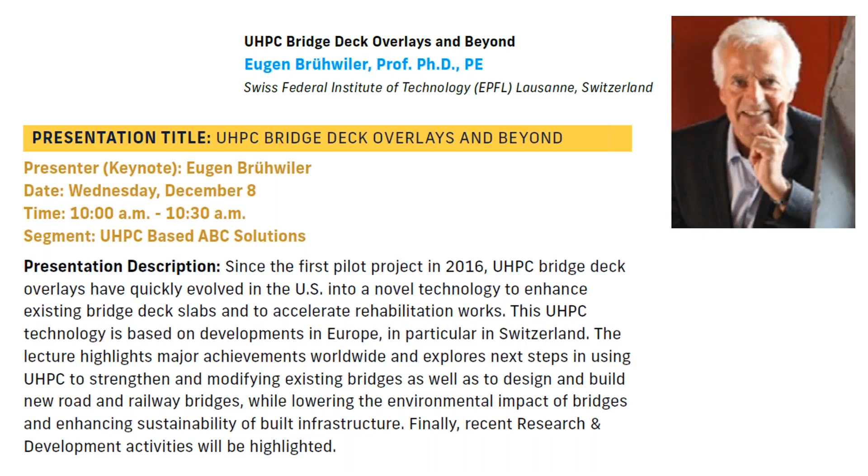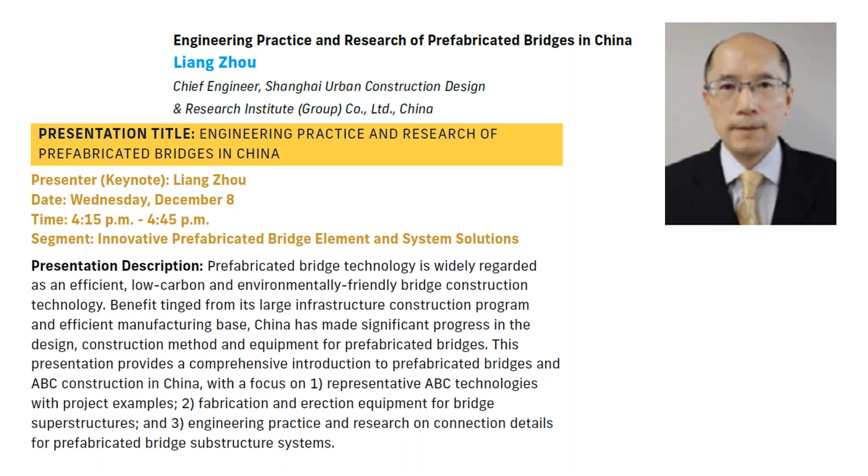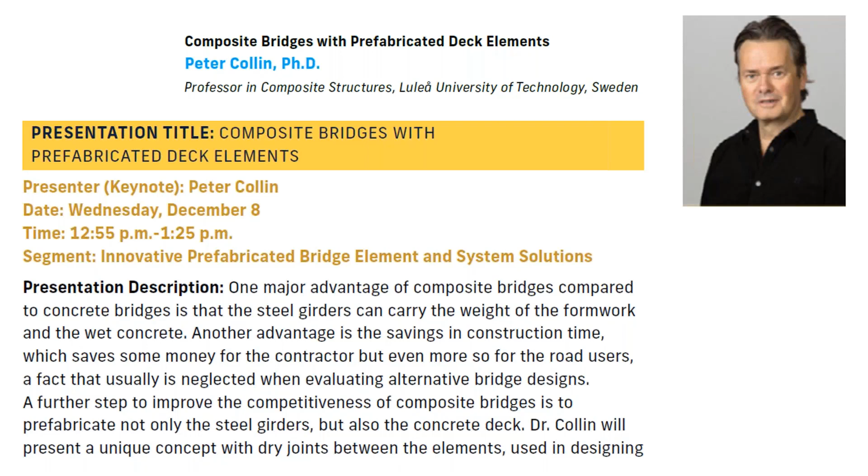We are going to have an excellent presentation summarizing everything China is doing in the ABC area. Liang Zhou, who was a chief engineer at the Shanghai Urban Construction Design and Research Institute, is going to give us a very comprehensive presentation on ABC in China. Peter Collin in Sweden is going to give us some really innovative concepts for prefabricated elements and modules for ABC.

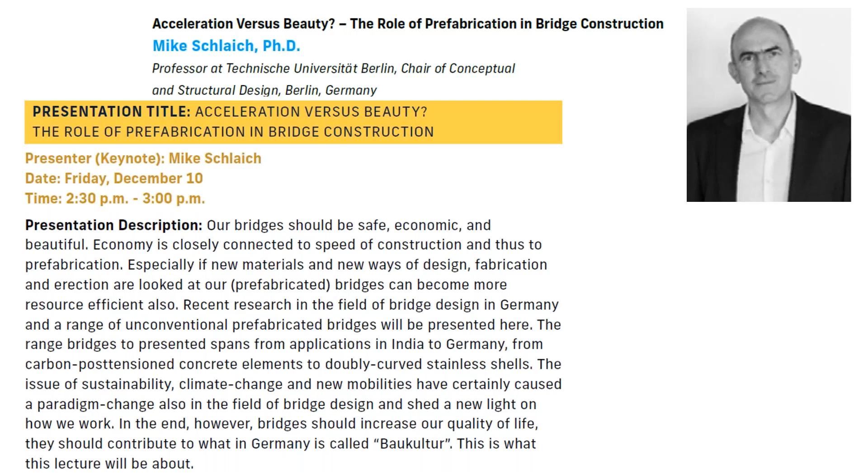Mike Schlaich of the Technical University of Berlin, and I visited his lab, they are doing some wonderful work in the area of ABC, specifically small segments that are built and then post-tensioned together. So he's going to give us a very good summary of the work in Germany. Other presentations in the conference: Miguel Ortega will be giving one on ABC for high-speed rail. So it's a very good opportunity for your contractors and so on that may get involved, especially on the West Coast, to see this.

Talking about the West Coast, Dory Mellon and Jay Holombo will be presenting the new Caltrans ABC construction manual that has been rolled out. There is a lot of interesting work going on in the development of new equipment for ABC in China. So Hu Shudong will be giving a presentation providing a summary of new equipment being developed for ABC use. And then we have Laurent Bjorn, who's going to give us case studies of UHPC field applications in Switzerland, both for retrofit, overlays, and so on.

The conference is going to include a very interesting workshop that's going to be hybrid. It's going to be held physically. You're going to see how it feels to make UHPC when you mix it and so on. We, the ABC UTC researchers, have developed a non-proprietary version of UHPC. In addition to us, many others have also developed non-proprietary UHPC. This workshop is going to allow you to see what we at the ABC UTC have done, and also six other universities that have independently developed non-proprietary UHPC.

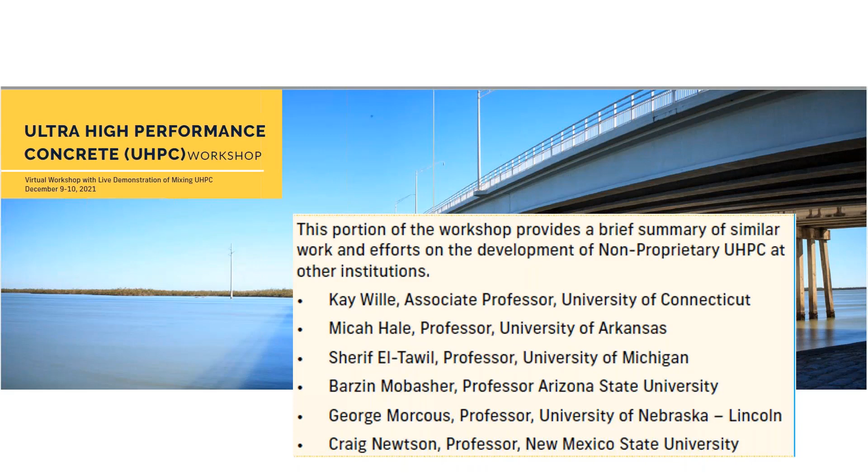This includes the University of Connecticut, University of Arkansas, University of Michigan, Arizona State University, University of Nebraska-Lincoln, and New Mexico State University. So you will see how simple it is to make UHPC and how simple it is to have the ready-mix company in your area make UHPC. Our objective is to show that hopefully within the next few years, it's going to be almost just like making regular concrete. So please encourage the ready-mix companies in your area to register and attend the conference.

So at a glance: 16 keynote talks, 30 presentations. It's going to be very entertaining. There's going to be music of the world in between the presentations. We are going to have a spotlight on the exhibitors. So if you would like to exhibit, please contact our staff. Like I said, the UHPC workshop, award programs, the reception, and of course, the exhibit hall.

We are also very happy to tell you that in 2022, finally, we are going to be getting together face to face. So the call for abstracts for 2022 is up. Go to our website. Please consider submitting an abstract.

Again, in summary, please assist us by registering early. If you have enjoyed all these webinars that we have held over the last 10 years, please show your support, register and attend the conference.

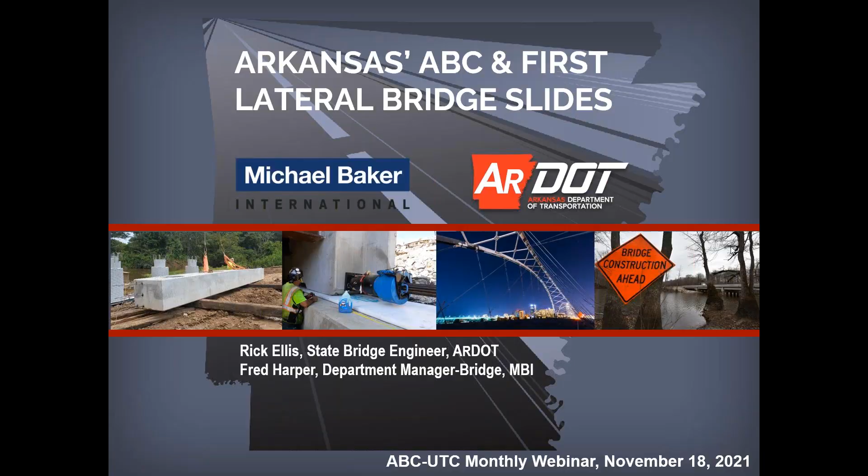Good afternoon. Again, my name is Rick Ellis, the State Bridge Engineer for the Arkansas Department of Transportation. My co-presenter today is Fred Harper, Department Manager for Bridge at Michael Baker International. Thank you for joining us today. I'll provide a brief discussion of the first 6 projects on this list. Fred will discuss the last project, our feature presentation.

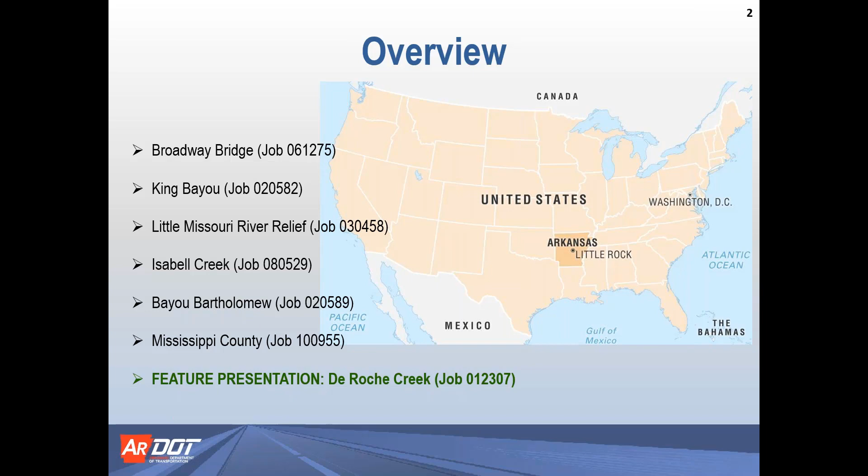During this committee, we developed our ABC evaluation criteria and flowchart, and a list of ABC methods that we would like to consider for use in Arkansas. ARDOT's ABC policy was implemented by our Deputy Director and Chief Engineer on April 24th, 2014.

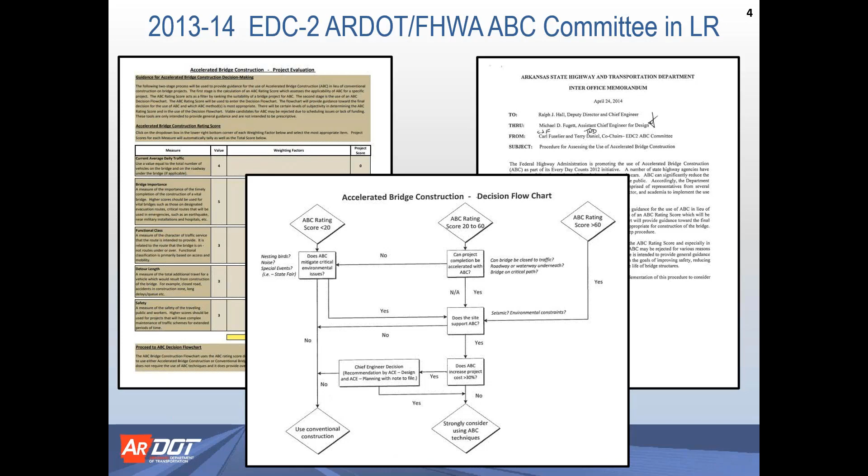Our first project that I would like to highlight is the Broadway Bridge replacement that was let in September 2014. It was designed by Garver Engineers and HNTB. It was twin basket-handle tied arches. And the project location is downtown Little Rock over the Arkansas River.

In our presentation today, you'll hear a lot about our A plus B plus C special provision. I'll discuss that a little bit in depth here so you'll know what those letters stand for going through the presentation. A is the contract dollar amount. The B for ARDOT is a subset or unique item within the contract that needs to be expedited. And C is the total contract days.

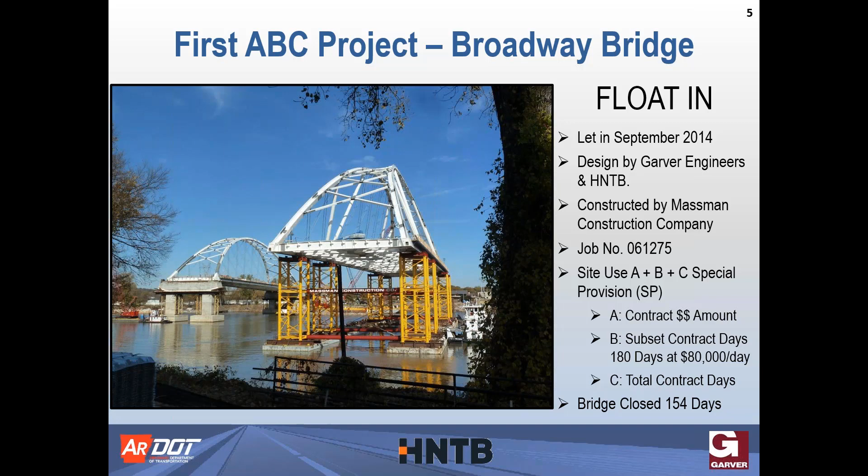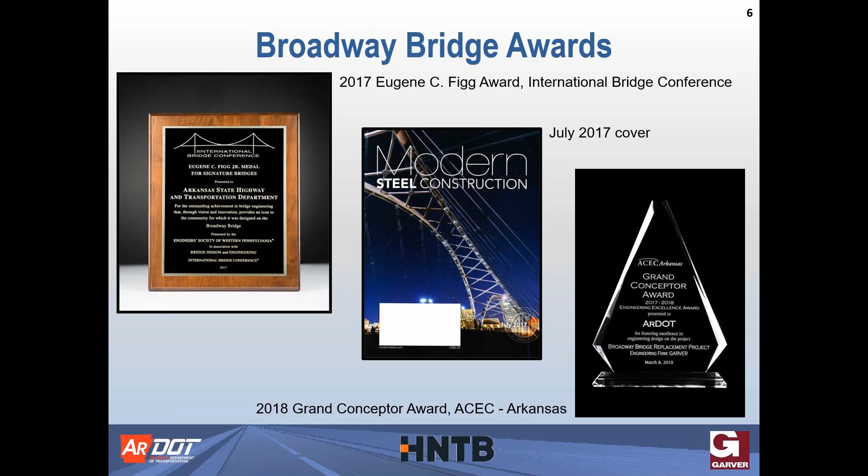For this Broadway Bridge job, the contractor was allowed to close Broadway Street, a major corridor over the Arkansas River between Little Rock and North Little Rock, for 180 days at $80,000 per day. The contractor received incentive as he only closed the route for 154 days. We're quite proud of this bridge. This slideshow just shows a small sampling of the attention it received.

Our first use of prefabricated bridge elements is at the King Bayou. This is a bridge in southeast Arkansas. Our options were to construct a temporary bridge or close the highway and use ABC. We had a reasonable detour, so we chose to close the highway and use ABC. We used precast bent caps and precast abutments, precast concrete channel beam superstructure units.

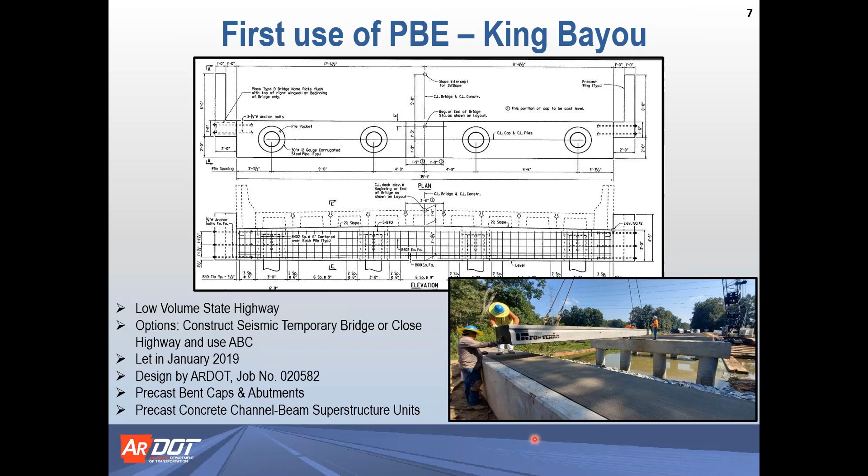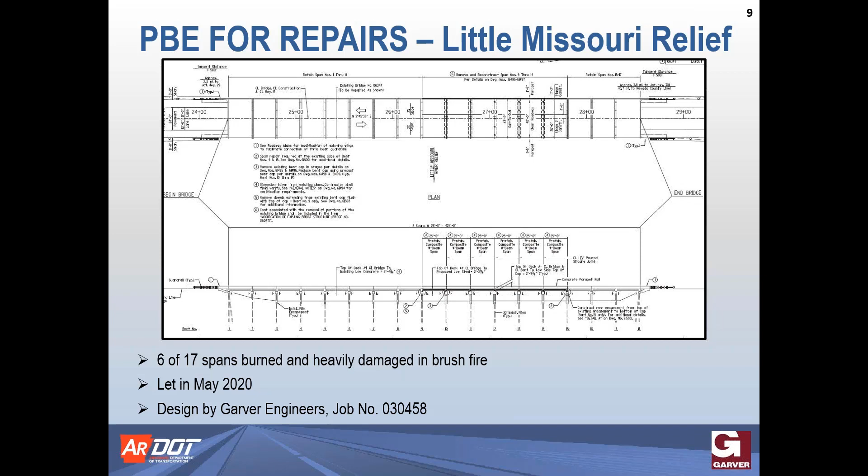Our next ABC project was also prefabricated bridge elements, but this time we used it for repairs. 6 of 17 of the spans of the bridge shown on the slide were heavily damaged by fire. We let this job in May of 2020, and the designer of record was Garver Engineers. This just shows a cross-section of the existing bridge superstructure.

Our maintenance of traffic options were a detour, which was too long, constructing a temporary structure, which for a 425-foot long bridge was too costly, or to use ABC. And we chose to use ABC, and we had to maintain one lane of traffic at all times with traffic lights at each end of the bridge. And we completely replaced 6 spans that were heavily damaged by the fire.

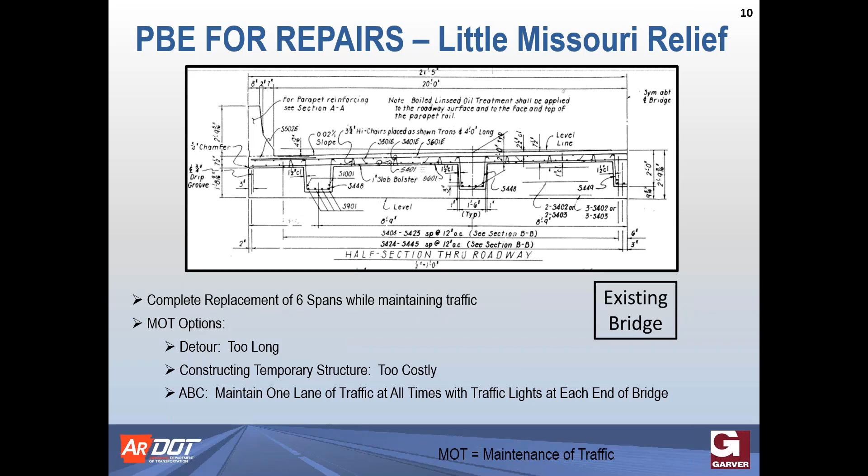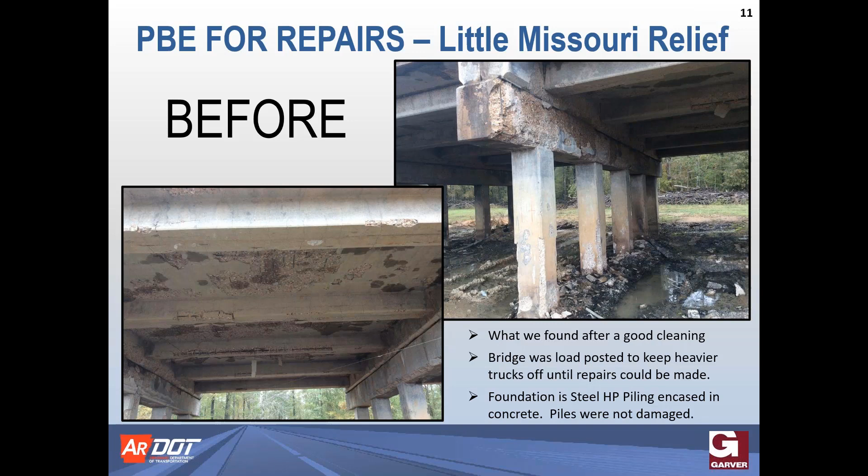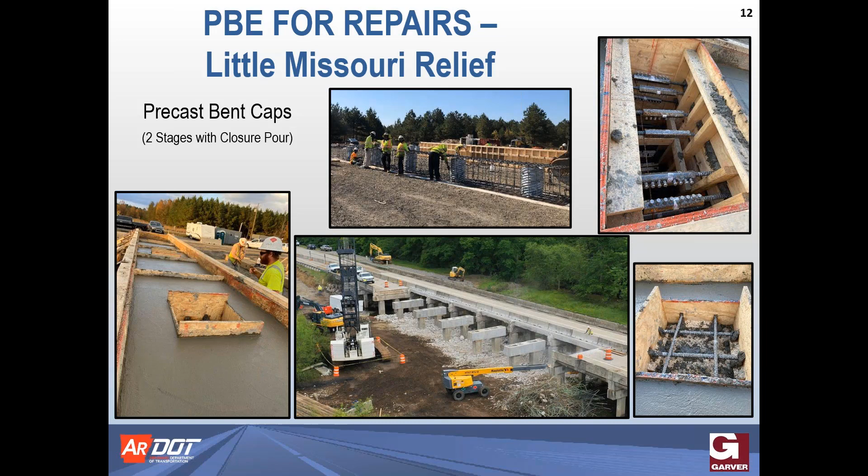This is what we found on site after we were able to give the bridge a good cleaning. The bridge was load posted to keep heavier trucks off until repairs could be made. The foundation element is steel HP piling encased in concrete, and the piles were not damaged by the fire. This slide shows multiple pictures of the precast bent caps that were used. Because we had to do this in stages, notice the couplers on the top right photo.

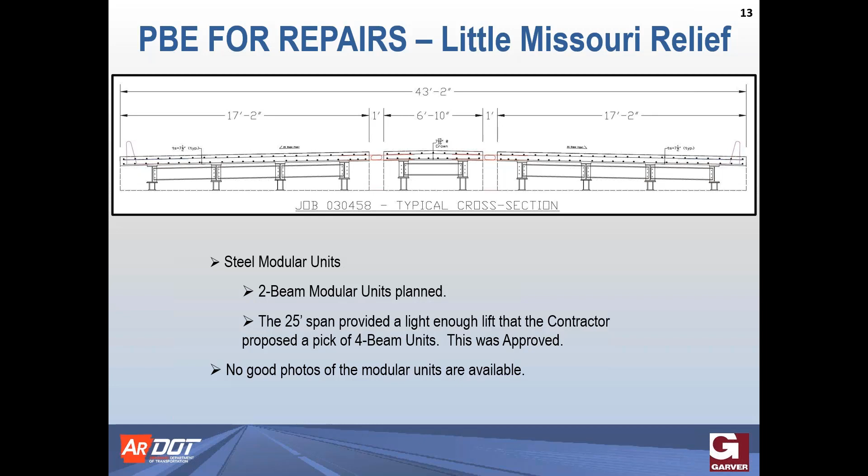We also used the A+B+C SP in this project, and the incentive/disincentive was $500 per day, and we allowed the contractor 75 days to complete this work.

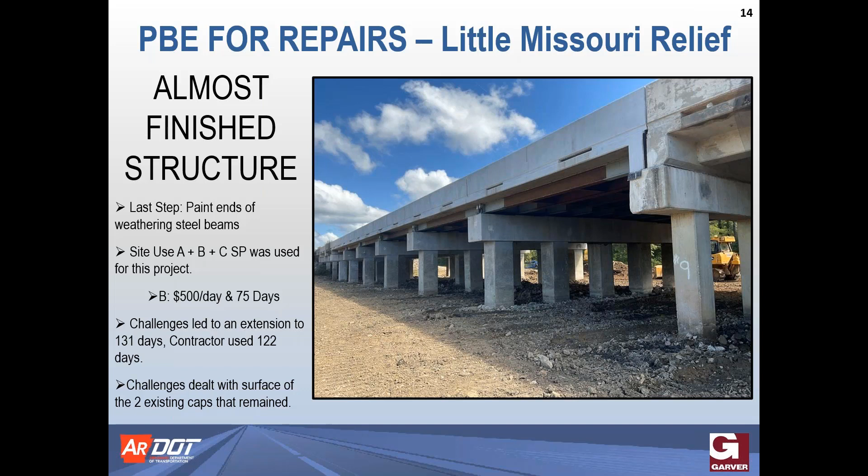Challenges led to an extension to 131 days, and the contractor only used 122 of those. The challenges dealt with the surface of the 2 existing caps that remained. They were intentionally roughened in the initial contract, and so in order to place the new modular units on the bent cap, there had to be quite a bit of modification.

Some more prefabricated bridge elements, this time on Isabell Creek. The precast abutments were fabricated before the bridge closure, and it consisted of pile pockets over top of H piles. The planned closure was 100 days. We intended to construct the drilled shaft intermediate bents and the columns prior to closing the route to traffic.

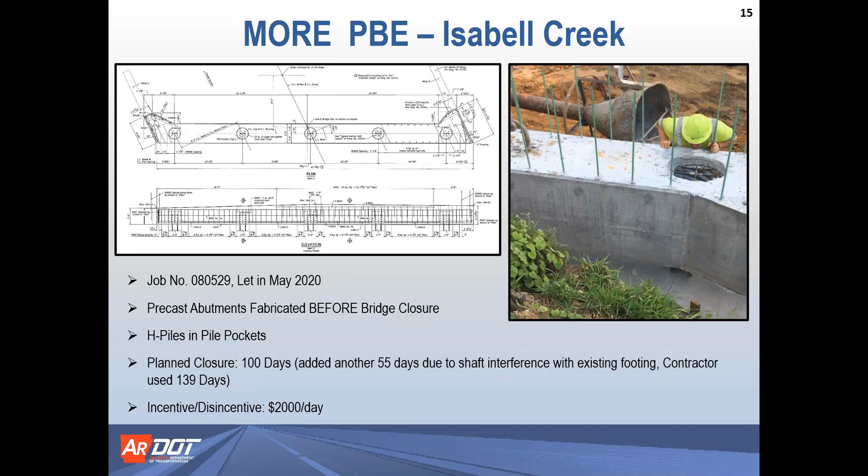And when they were constructing the drilled shafts, one of the 6 actually interfered with a spread footing. So we had to extend 55 days to closure. The incentive disincentive was $2,000 per day. Here's a photograph of the drilled shafts and columns. Again, they were constructed outside the footprint, and the existing bridge was very narrow.

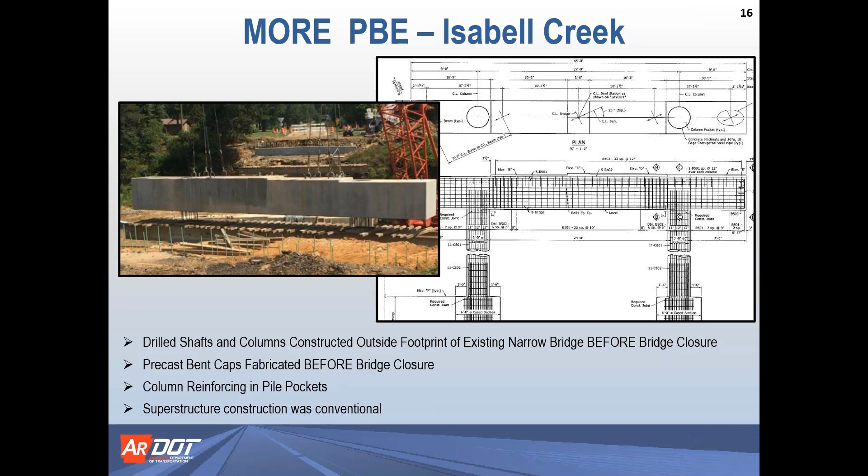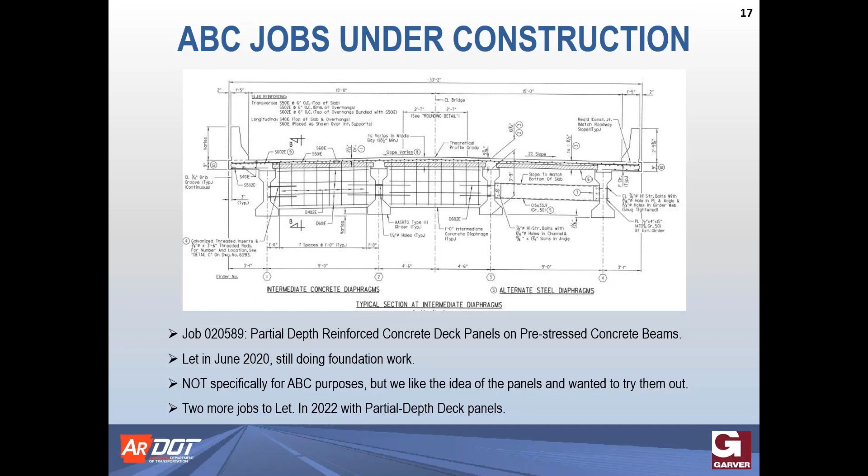Precast bent caps were also fabricated before bridge closure, and the column reinforcing extended into pile pockets. And superstructure construction was conventional. This is another ABC project. It's under construction currently. We're using partial depth deck panels on pre-stressed beams. It's not really specifically for ABC purposes, but we like the idea of the panels and wanted to try them out on a project. We have 2 more jobs being let in 2022 with partial depth deck panels.

This is our 2018 Competitive Highway Bridge Program grant job in Mississippi County. Arkansas was one of 25 eligible states for the grant. The selection criteria was bundling, innovative technologies, structural condition, and support for economic vitality. For bundling, we had 9 bridges and 5 box culverts proposed for the job.

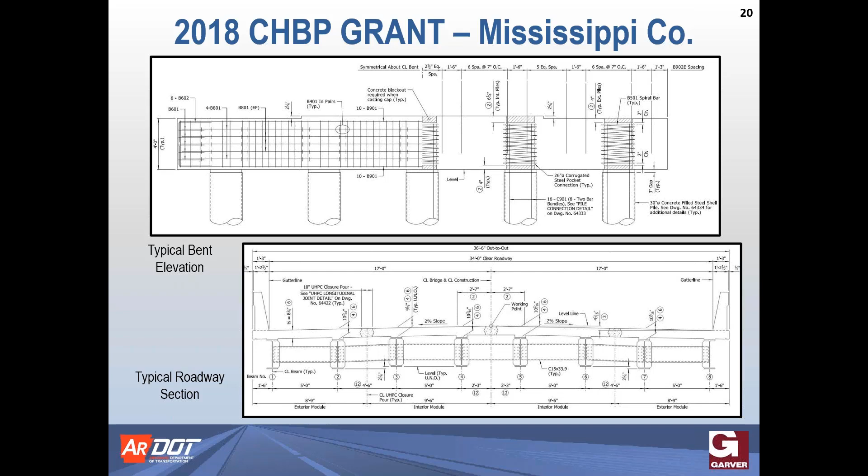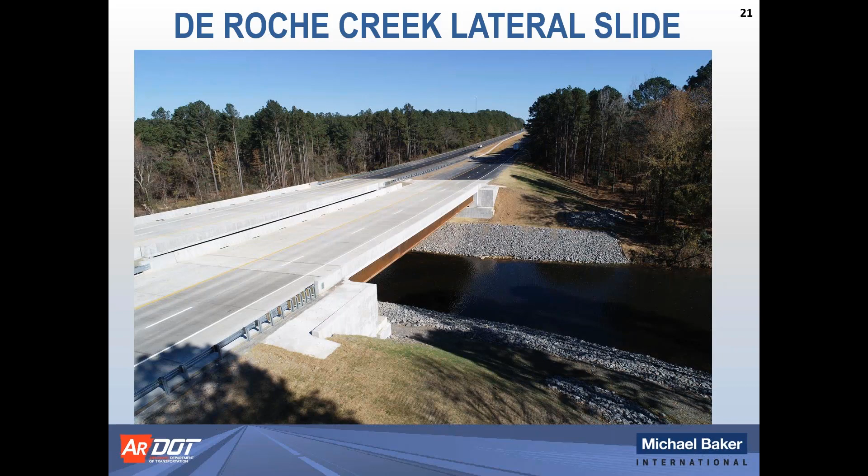So the feature project today is the Interstate 30 DeRoche Creek Lateral Bridge Slides, and we're very pleased to be called upon by ARDOT to help them out with this project. Our company has some history with doing a lot of ABC work out in Utah. I know they're very progressive out there, and have tried out a lot of new things, and we're able to lean on their experience for this project.

So I wanted to give some background on the project location. This DeRoche Creek project is located on Interstate 30, just to the southwest of the capital city of Little Rock and the small town of Arkadelphia. This also, as you'll note, is on a major truck corridor between Little Rock and Dallas. Carries about 30,000 vehicles per day with greater than 50% trucks. So this site served as a great location for the department to try out this ABC work.

There was enough demand there to justify the use and added expense for this construction method. So I wanted to give some background on the planning part of this. So ARDOT had, before it even came to us, decided that this would be an ABC project, and Rick had given some good thought to how that might actually be constructed.

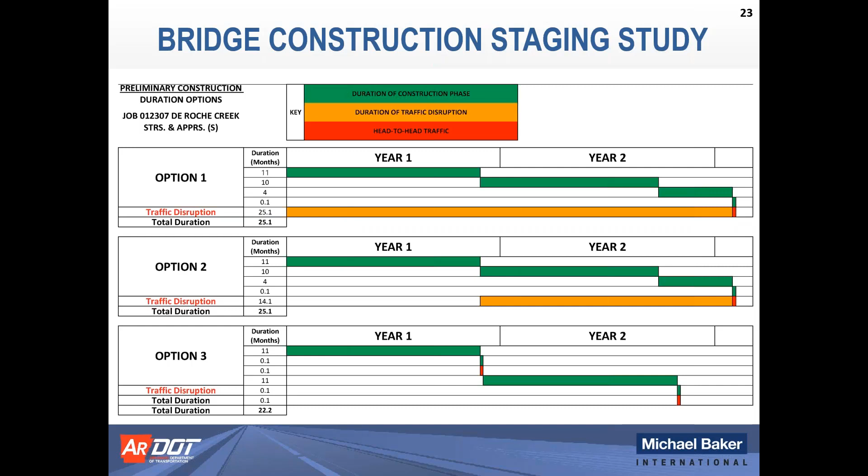So you can see from this slide there's a massive time benefit for option three. So we've been able to do all of the staging work, substructure work, without even touching the interstate traffic. So we get down to a very small head-to-head closure, which is represented by the red dots, which are a little bit hard to see here because it's such a short time right here on this bottom. So you can see the massive time benefit that ABC would provide on this project.

So the last slide was the idea that we had at the planning stage, and we went ahead and put together the actual construction timeline. And as you saw from the last slide, we had the eastbound and the westbound bridges working in sequence, and in reality it ended up being a lot more overlapped with the schedule. So we had the substructure that would be constructed that would suit both bridges, and then the new superstructures were built nearly concurrently. So you can see overall we ended up with a total construction timeline of just under a year. So it was quite a bit more abbreviated than what we had initially assumed.

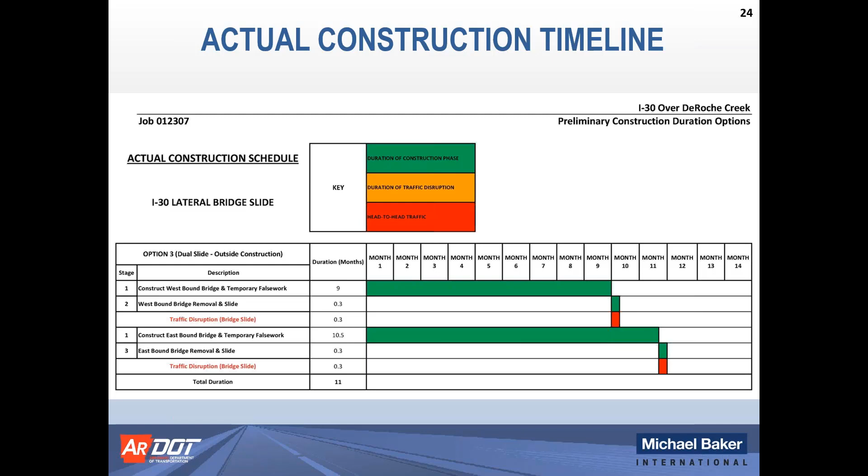The first of which is that it simplified our slide process, not having to coordinate moving multiple spans, which for a 3-span like this, we would typically design a continuous superstructure there. So not having to coordinate jacking between multiple bents and really watch that and have very tight tolerances. We're fortunate in this case that the geometry and our vertical freeboard to the design floods were ample enough that we could afford to drop that low chord down a little bit and utilize a simple span.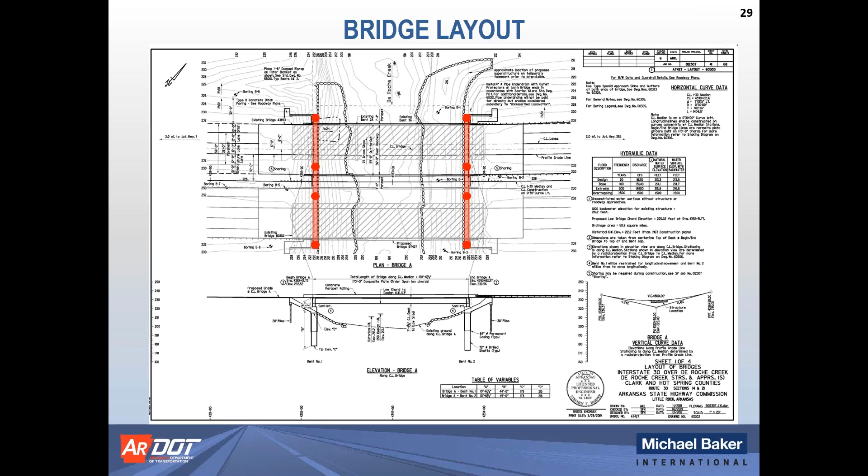And then about the time that we got to our 90% plan review, the department came back and the planning folks had elected to go ahead and widen these things for 3 lanes, a future 3-lane widening. So that was I feel like a really wise decision to go ahead and take care of that at that point. With the detailing and the design being so critical, this would be a very challenging bridge to widen at a later point.

So there were a handful of things when we were doing the design of this project that we wanted to keep in mind, and the purpose there is, at each component of the design, to see if there's a way for us to trim out any time, specifically with the short-term closure period. The initial concept going into the bid letting was that we were anticipating about a 3-day closure, a long weekend, about 60 hours. So with a fairly congested time frame, we had to shave as much time out of that as possible, to do as much work before the closure as possible. So I wanted to go over a couple of these things.

Lengthened approach slabs. So the existing 3-span bridge had approach slabs, and with our shortened bridge, we elected to lengthen the proposed approach slabs such that they would give us a lot of benefit with our roadway work. So those new approach slabs actually extended beyond the limits of the existing, such that the roadway approach work would only consist of milling and asphalt overlay operations. So that would really speed up the process there.

We specified high-early strength concrete in the approach slabs, specifically for the portion that was going to have to be opened within the 3-day period. We also used a precast approach gutter on the side that would be opened first and would have to have a quick connection to the guardrail. As you'll see later, that did not end up being used, but that was the initial concept to meet the 3-day schedule.

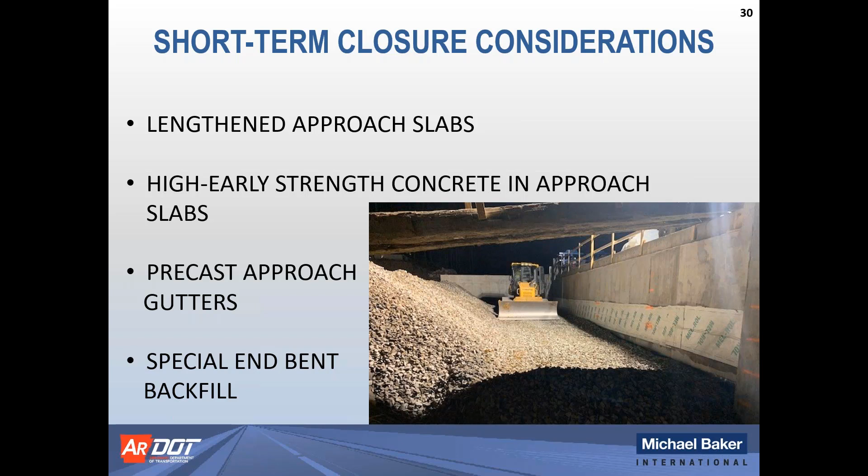Looking in the lower right, you can see the special end bent backfill that we used, as opposed to an SM1 or a Class 7 type material, which is commonly used. We ended up using something more akin to a railroad ballast. So it doesn't have the percentage of fines in there, and it can be compacted much more quickly, and it's also free draining, which is good.

At this point, I'd like to go through the lateral slide construction sequence and show you step by step how this thing came together. So starting off on this first slide, I'll introduce the scheme here. In the upper left of these slides, we've got a 3-dimensional MicroStation drawing that we produced as part of the design process, and these all have the components separated out where we can see step by step how this thing was to be constructed, and it's pretty remarkable how similar it turned out. And then on the lower right, you can see the as-built construction condition and what that looked like.

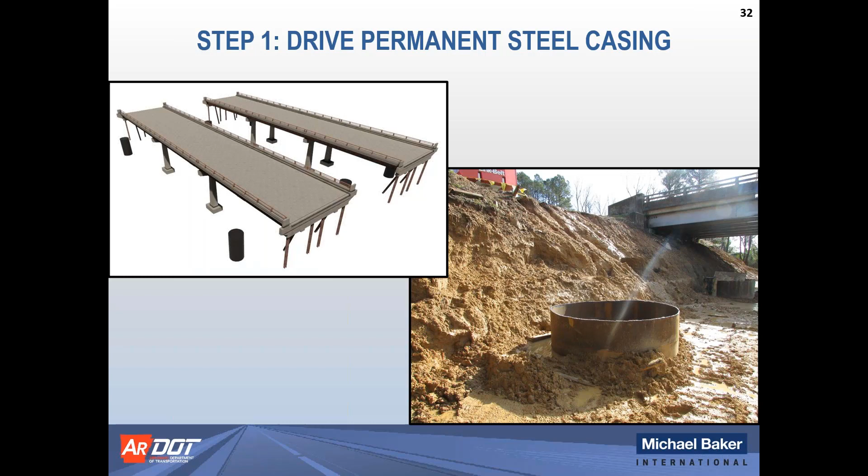So the first step in this project is to drive permanent steel casing for the drilled shafts. We've got a moderate amount of overburden, and then we are founding this bridge into a sandstone and shale bedrock, so the permanent steel casings were driven down and seated into that rock initially. After those are in place, it's time to do typical drilled shaft construction, auger bits to remove the overburden material, and then rock coring bits used to create the rock socket.

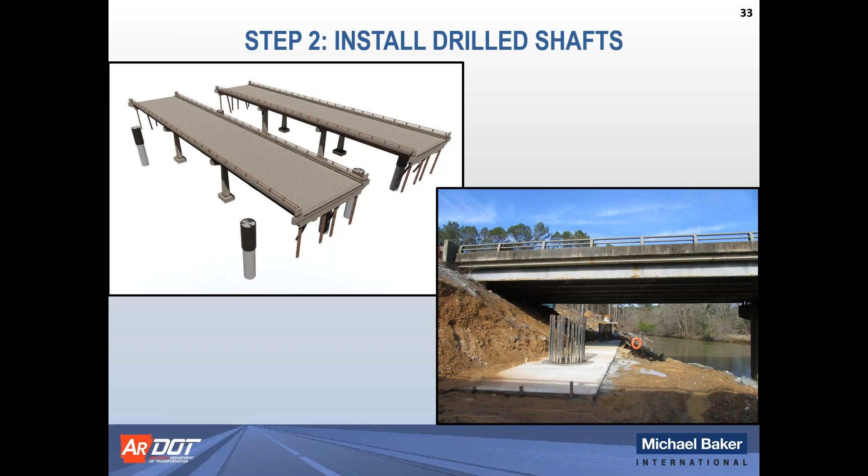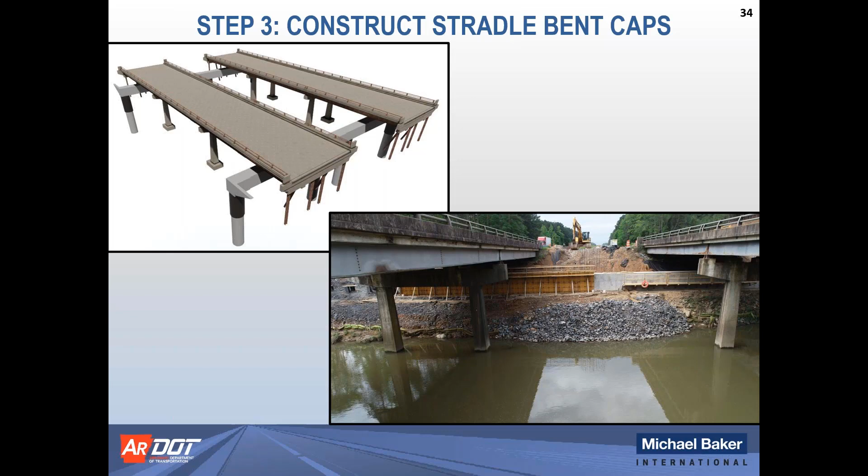So you can see in the lower right hand corner, we've got the drilled shaft reinforcing cages protruding on the bottom there. It's actually a mud slab. That's not part of the design cap. That's just a mud slab to give them a nice clean working area under that bridge. And you can see we actually ended up with fairly comfortable working headroom, even though it is obviously going to be more labor intensive to stick build a cap underneath like that than being able to lift it whole in place. After the drilled shafts are in place, it's time to build the straddle bent caps. You can see that we've still got a good amount of headroom there for them to work.

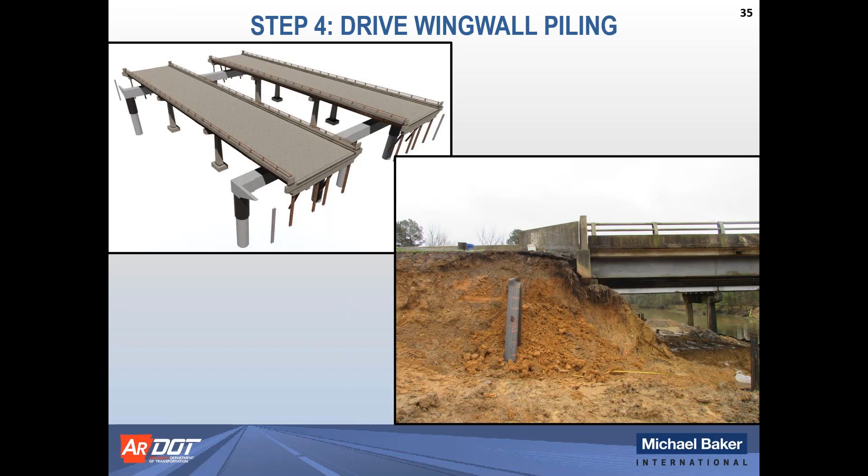Wing wall piling was required on this one. The fact that we're shortening the bridge from the original 3-span down to a 170-foot simple span is going to necessitate a lot longer wing. We ended up with a 25-foot long wing wall, so we had to have the wing wall piling to support that weight.

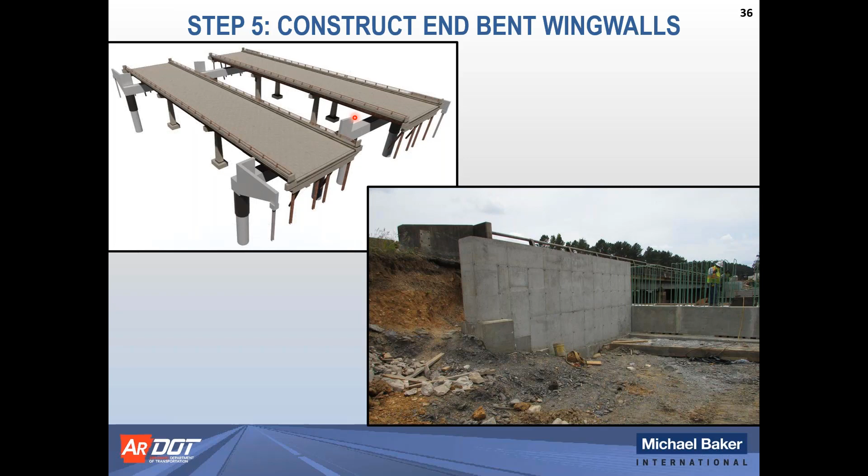Next come the end bent wing walls. And you can see here, let me get my laser pointer, that part of the idea with these is to build as much of the wing walls and these little front facing walls, and get them as absolutely close to the existing bridge as we can. We also had to construct a center wall in the median that would eventually line up with the semi-integral back walls. At that point, it's time to start working on our temporary falsework.

So originally we had a conceptual drawing and construction phasing in our plans that really just spelled that out schematically. With this being a design-bid-build type contract, we didn't dictate specifically exactly what the falsework design would be and exactly what the lift and the slide system would be. We wanted to give as much flexibility as we could to the contractor with their preferred means and methods. This was pretty close to our assumption of what they ended up doing.

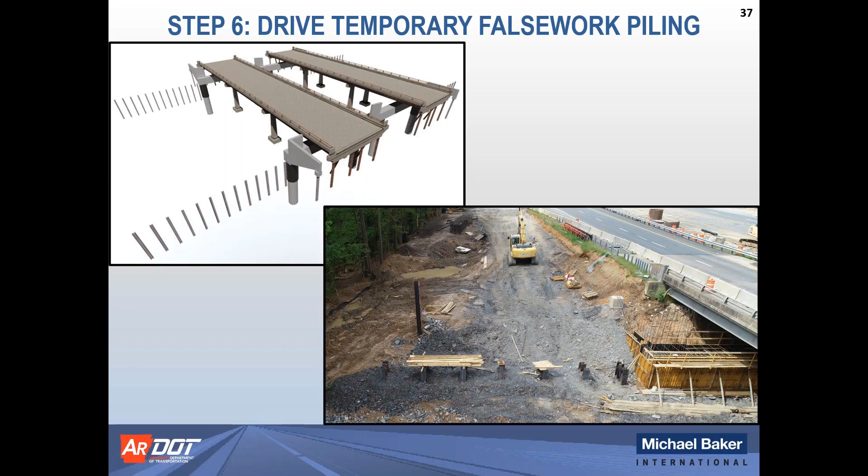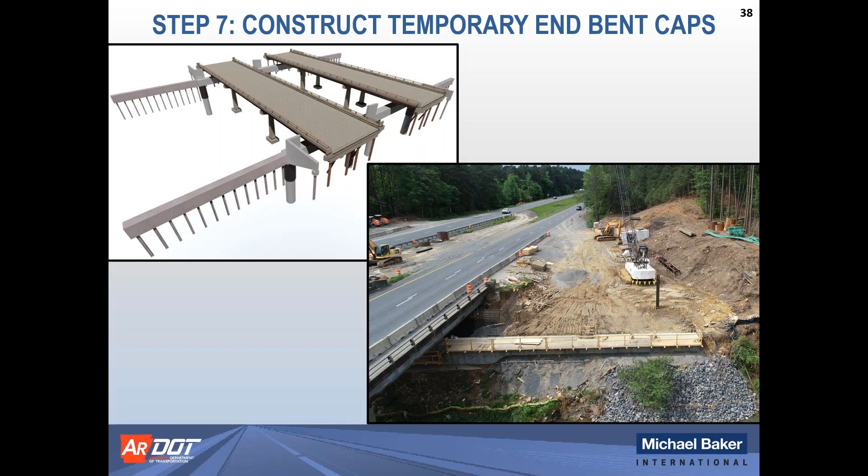Okay, so after the piles are in place, they're going to construct the temporary end bent caps. A couple things to point out: geometric control is crucial. We've got to have our geometry dead on with our end bents, parallel direction, level, and a smooth surface that was within fairly tight tolerances as memory serves. So it's very important to get all those things right before we think about shutting down traffic.

So after we've got the temporary falsework in place, it's time to start building our proposed superstructure. As I mentioned earlier, this is a semi-integral end bent configuration, so we've got a couple different pours that we handle that in. The first pour, the lower part of that diaphragm, as you can see in the lower right picture, we've got some steel shoe bearings that are just temporary. They will eventually be encapsulated in that concrete end diaphragm. You can also see the steel plate girders in the background there.

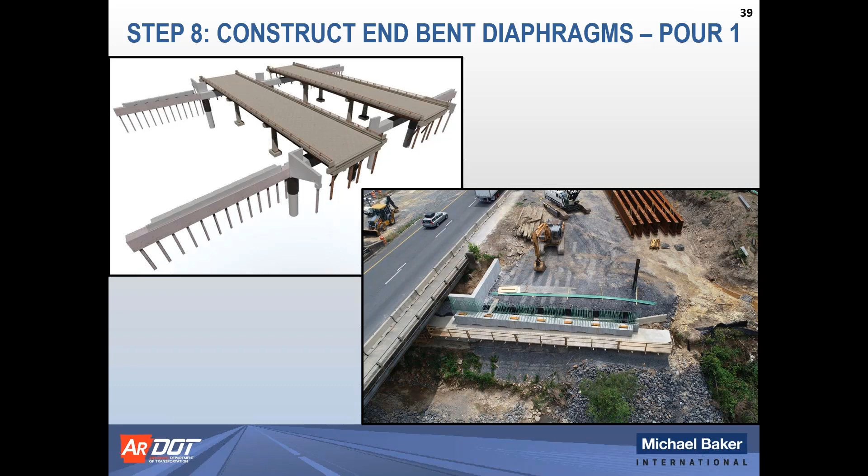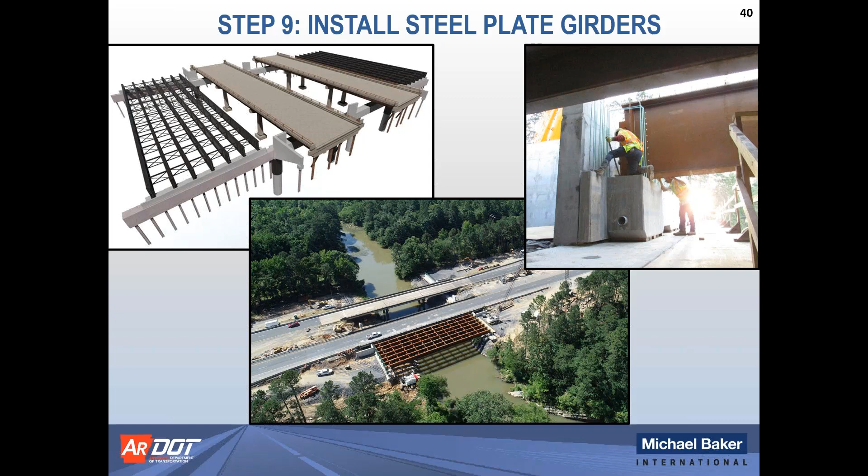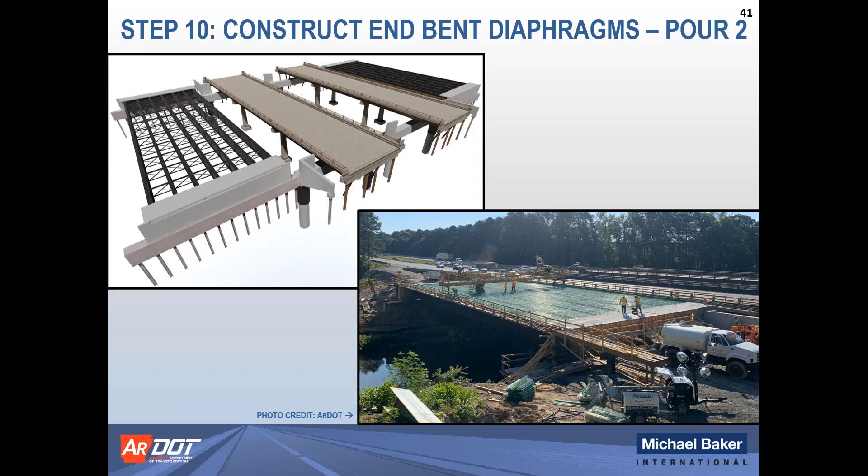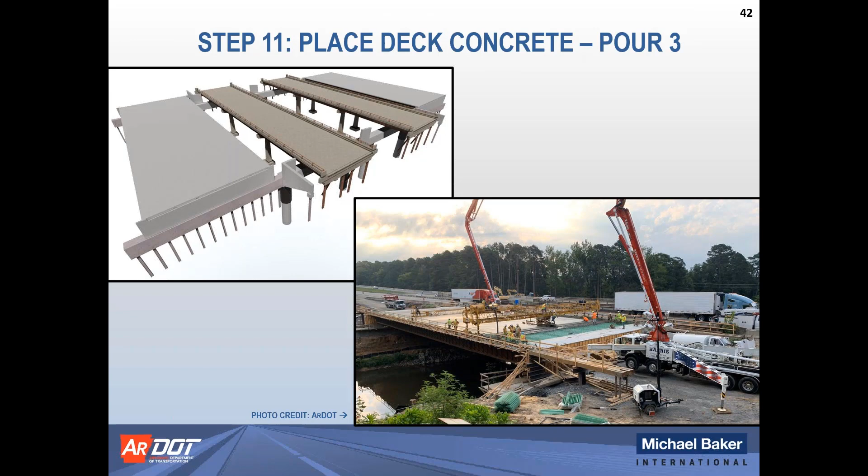Once the girders are in place, we're going to do the second half of the semi-integral end bents. You can see we took that to the top of the slab and did about a 5-foot section of the slab. Next, we're going to pour the balance of the bridge deck. This is fairly typical construction with a pump truck and Bidwell screed completing that work. After the bridge deck's in place, we're going to install the single slope railing. This is 3.5-foot tall interstate railing that we've got on that bridge.

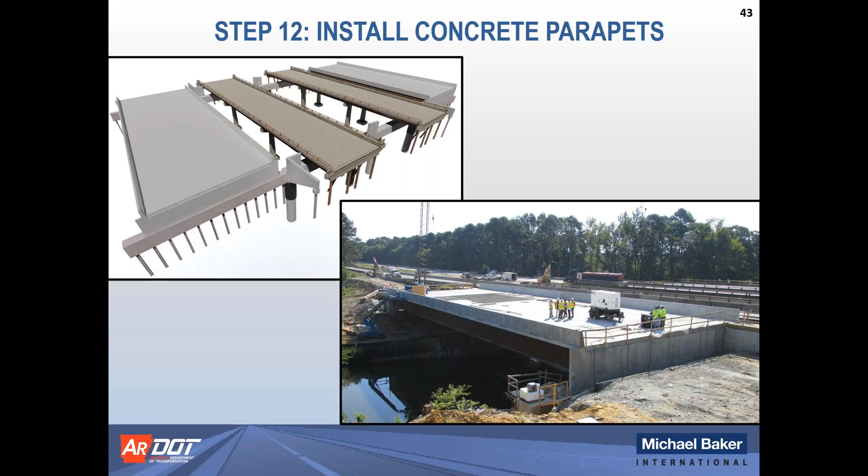Again, just want to emphasize the point that we're trying to complete as much of this work as we absolutely can before we close the traffic. We want to maximize this part and minimize the work that we're doing in the short-term closure period.

So as we're getting closer to being able to do a slide, one of the things they're going to have to do, because of course we have to slide these one at a time, is that we had originally envisioned the contractor using steel sheet piling in the median that would encapsulate the backfill for the first phase of the work, and then when the second bridge would come in, they could remove that.

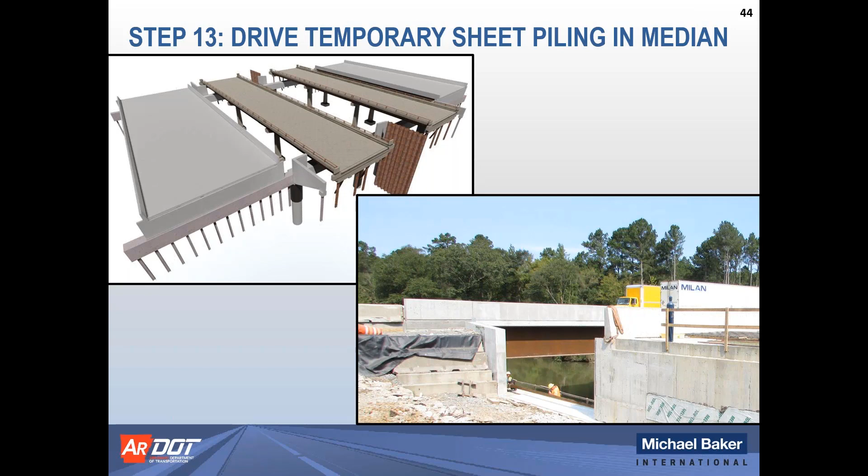So an interesting little wrinkle and difference from our initial thought is, if you look in the bottom right picture, you can see instead of using that steel sheet piling, the contractor elected to essentially build themselves a little gravity wall with some used portable concrete barriers. They just battered that thing back, stepped it back, and it seemed to work really well. So I'm always amazed at the innovations that the contractors can come up with.

After the sheet piling's in place, we're ready to start the short-term closure. And of course, I want to take this opportunity to emphasize the importance of the pre-planning. On this job we had special communication plans, we had contingency plans, and there were several parts of that. It was much heavier on the front end with the pre-planning, and I just want to emphasize that and keep that in mind, because once the traffic is moved over and we start demolishing the bridge, there's no going back, and you can't not deliver. So we have to make sure that we can get there.

So you can see here that once that side of the interstate was closed, we're going to have head-to-head traffic on the opposite bridge that is still in service. We initially envisioned this as a 3-day window, but as it turns out, through the initial bidding process and through the letting and communication with contractors, that was relaxed a little bit. So the winning contractor ended up bidding, if memory serves, 10 days, and they ended up completing it in 8. So there was a little difference there, but still very, very pleased with a fast product.

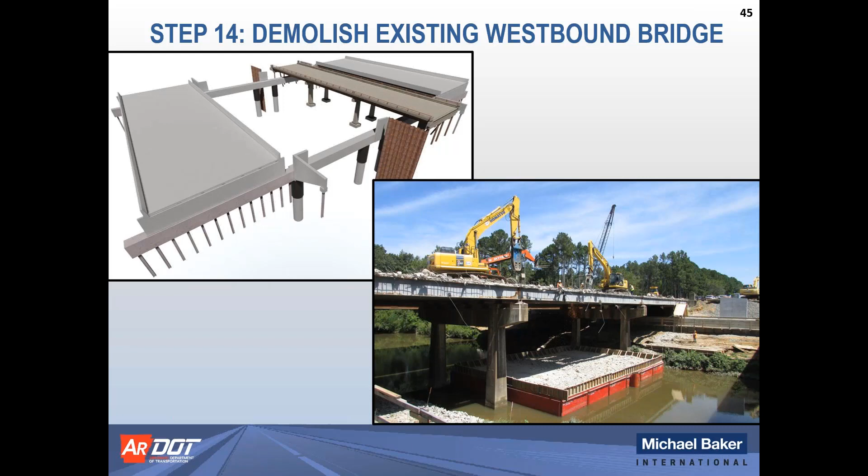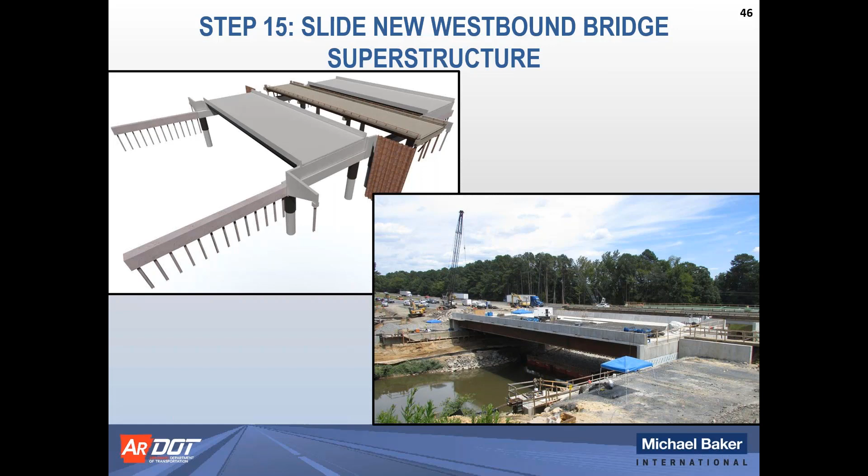After that bridge is demolished, we can slide it over, and this actual slide process took about 10 hours. Started early in the morning and very late afternoon they were done. So it's kind of slow and fast at the same time. It's one of those things you don't want to go lightning fast and damage your structure. So they were able to do that, and things went very smoothly. So you can see in the lower right picture, this westbound bridge is about halfway home. You can see we got that outside wing wall about midway through the bridge deck there.

I'm going to take a minute to talk about the actual lateral slide mechanism that the contractor ended up using. So since we had the design-bid-build project, we used a special provision to set up the process for designing the temporary works in the lift system, in the lateral slide system. And the contractor chose to partner with VSL Structural Technologies, and they did the final design for the reaction frames that you see in the upper left picture, and then also the lift system to lift the bridge in the lower right.

As part of giving flexibility in the plans, you can see the jacking pockets that we had detailed in the lower right picture. So those pockets are placed between the girder lines, and there's enough room in there for them to get the jacks in there. And also there was an option in the plans for a Hillman roller. So in the plans we envisioned them using either the PTFE and stainless steel slide surface or a Hillman type roller. So those pockets were detailed in there to give them flexibility, again, not knowing exactly what their preference would be.

One thing I wanted to point out here that was really neat, there was a lot of controls with this coordination, as you can imagine. When we've got multiple points of jacking that have to be coordinated very carefully, they had the control center up on top of the bridge, which I'll show you in a minute. All the hydraulic lines, they had a manifold to make sure that the pressures were even to all these things. So of course they're monitoring pressure up on their controls. And then you can see right here, they actually have a little distance measurement too, so they can also make sure that we're having even jacking between all the bearing points.

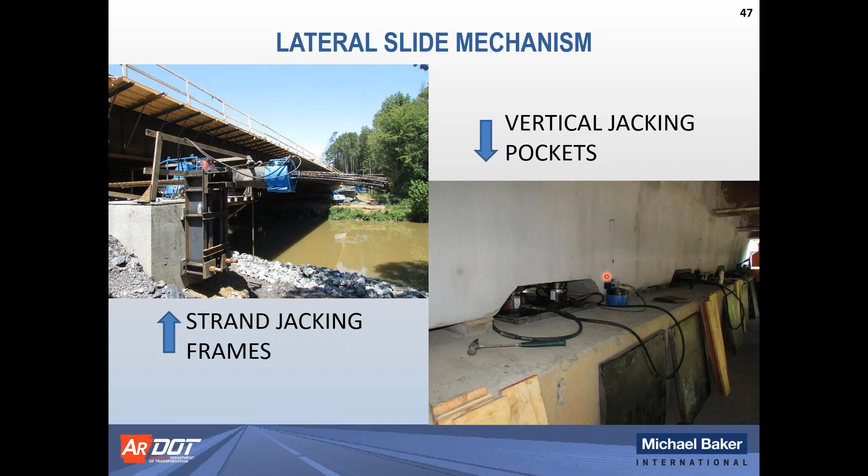In the left picture here, you can see the hydraulic controls. That's one of the VSL workers that is running the lateral slide operations right there. So he's got gauges to monitor what's going on. And then in addition to that, we've got the old-fashioned tape measure method to check that. So we had several ways to make sure that this thing was going according to plan. The right-hand picture, you can get a good view of the entire system.

At the very bottom, we've got one of the reaction frames that VSL designed. And we've got this bundle of stressing strands right here that went from outside to outside of the temporary falseworks. Altogether, this whole system was nearly 300 feet long, and of course, it takes a tremendous amount of force to move this thing.

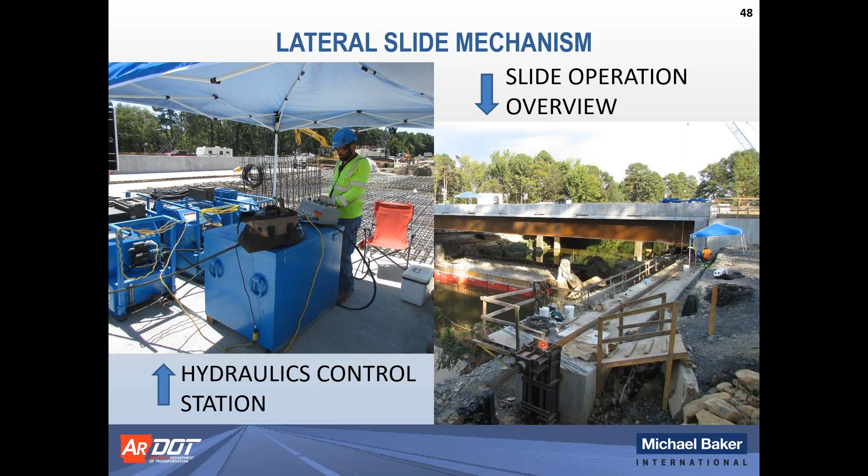And then one thing you might notice in this picture, this is taken during one of the move cycles, and you actually see that it's a little bit slack in there, which is another thing that again we know by theory and calculation that it's going to do, but it's always really interesting to see it in real life, to see those cables get loaded and sometimes be completely slack on the ground on the back side of that tension there.

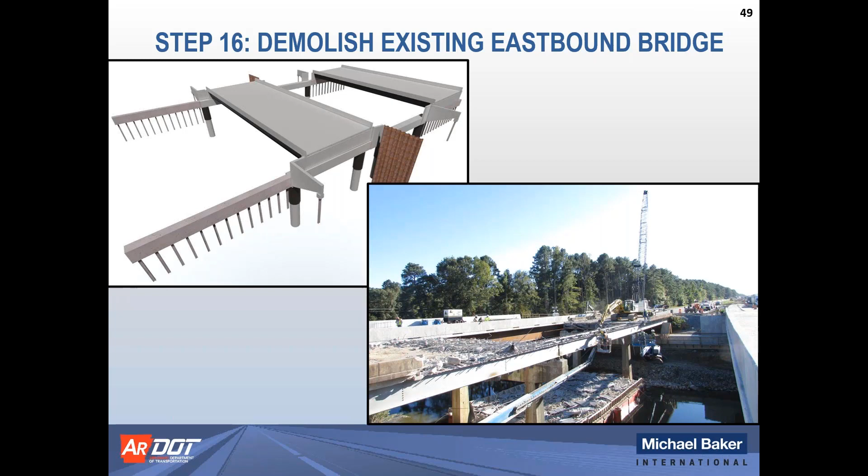Okay, so after the westbound bridge is moved into place, it's time just a few weeks later to switch over. Traffic was moved over to the new bridge, 2 lanes of traffic over there, and it's time to deal with the eastbound bridge. So it's going to be demolished in a similar way. After the old bridge is out, it's time to move over the new bridge. And these are some of the final details that I was really excited to see.

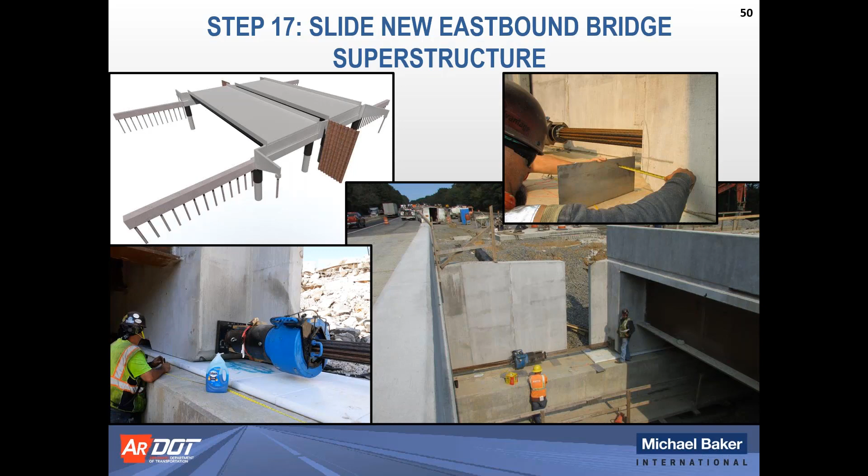So you can see the jacking strands on the strand jacks on the lower left, with the blue painted jacks there. We actually had those on both sides of our semi-integral end bents, and the purpose of that was a requirement in the plans to be able to reverse direction if we need to, if they happen to overshoot their final location. Fortunately, those were not needed, but I do think that was a good decision to have those just in case they might have been.

And here's a picture of our completed construction. As you can see, this is taken about a month after they finished up and got the grass all seeded, and looks really nice and clean. And to the traveling public, it's going to look very similar to many other new highway bridges. But as a structural engineer, you can get down there and see the differences and appreciate all the extra work that went into an ABC construction.

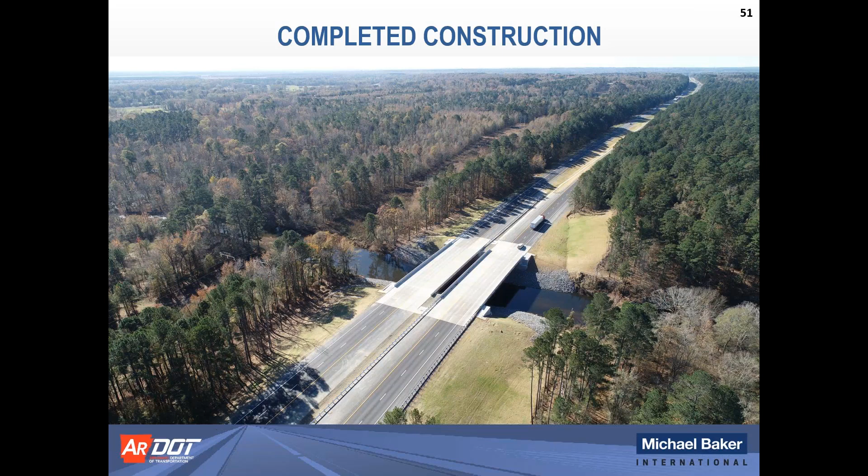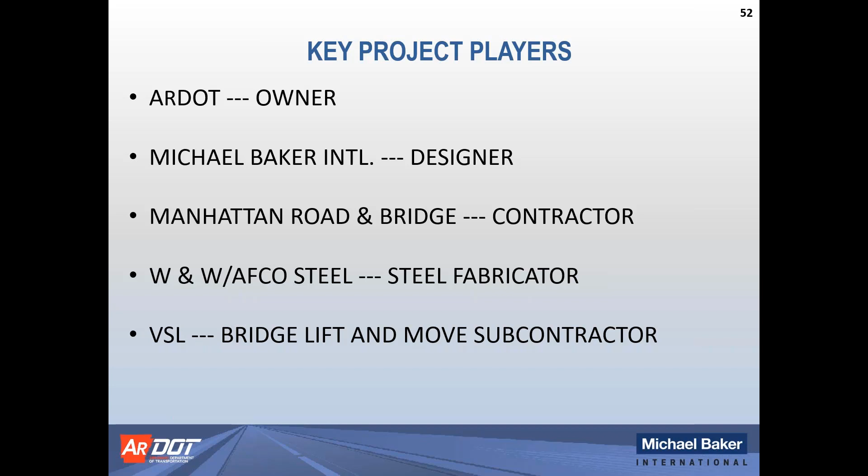I want to go over a couple slides here with the key players. ArDOT being the owner, Michael Baker, us as the designer. Prime contractor was Manhattan. W&W AFCO Steel out of Little Rock was the steel fabricator. And then, as I mentioned earlier, VSL was a specialist for the bridge lift and the move, the lateral move.

So with any project, you're going to have some challenges and lessons learned. Overall, we're happy that this project went very smoothly. There weren't any major issues or delays. Like with any project, there's going to be some imperfections with construction that they're going to have to overcome. One thing that I wanted to stress here is not so much of a lesson, but I guess it kind of is a lesson learned.

One thing that we appreciated that went well is just the critical planning with the geometry, particularly with this one being on a half-degree curve. We had a specific staking layout, staking diagram for them to make sure that we got everything positioned correctly. And it did, but it was one of those things that took a lot of concentration to make sure that we had everything where it needed to be.

As part of our special provisions for the slide plane, we did a test slide, which I think is a great idea. So several days before the first actual slide and closure, we did a test slide, where we just moved the bridge about 3 inches laterally and then brought it back just to make sure that all the equipment was working correctly.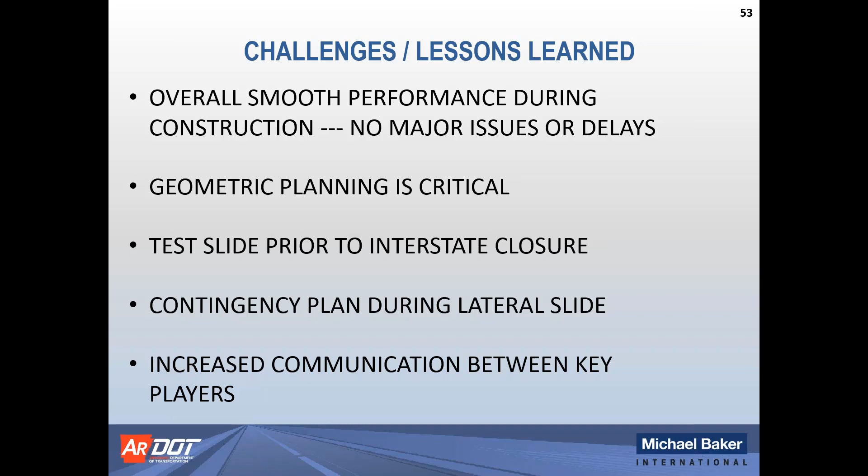And we had a lot of increased communication between the key players. We had several meetings as part of the construction process before the actual slide to make sure that everyone was on the same page. Of course, communication is key. We had everybody on speed dial in case anything was needed during that time period. So I had a quick time lapse that I wanted to show to the group here of the actual slide process.

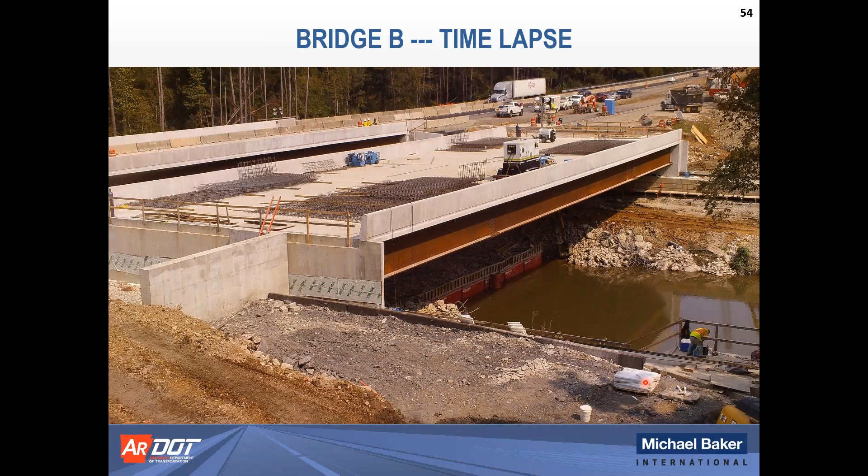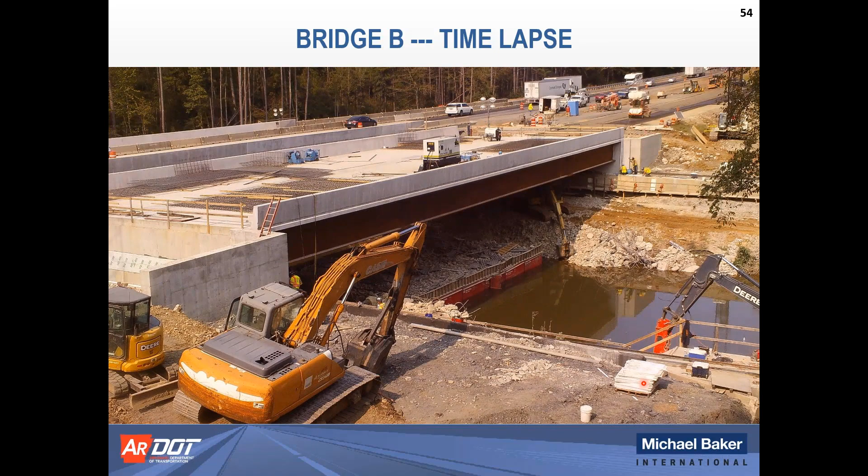You can see we started early in the morning with the slide. And as the bridge is moving over, if you look in the lower right-hand corner behind the John Deere track hoe, you can start to see the white Teflon track that's being picked up as it's moving along there. You can see at that point we're about there right there.

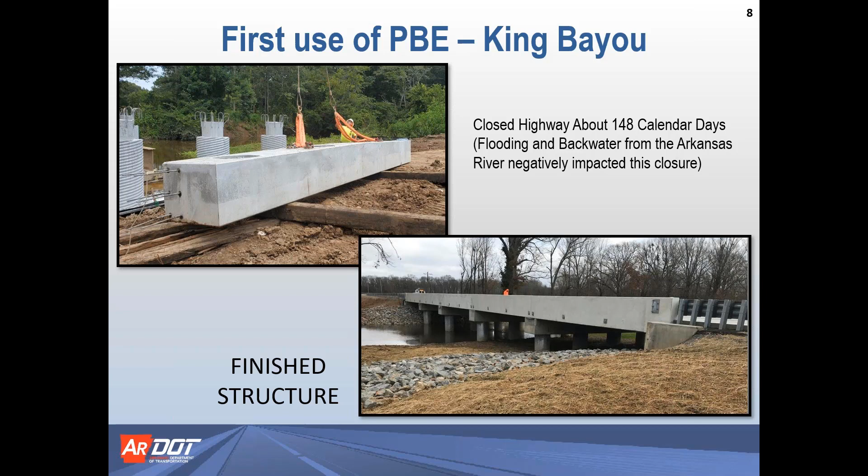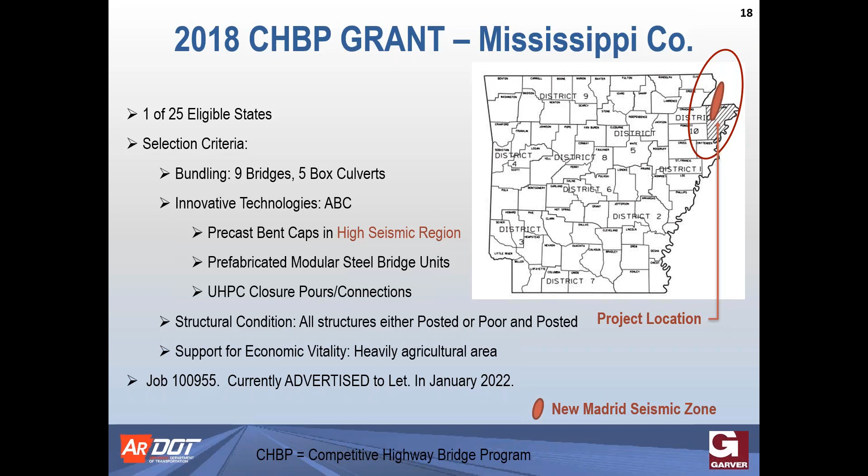Okay. The next question is on slide number 18. It says 120 days for bridge replacement and 20 days for box culvert replacement. Doesn't the 20-day box culvert replacement requirement pretty much dictate precast units? That's slide 19, and yes. Yeah, it's the next slide, Fred. Yeah, the 20 calendar days is pretty much going to require precast box sections. And those are used quite often in Arkansas.

All right, thank you. Next question, is there any limitation for the bridge span length and weight for using the lateral slide construction method? That's a good question. I'm sure there is some practical limit. I know that at least on this project, we're not approaching that. So I'm sure that'd be just a case by case decision there. Okay. Yeah, with this being our first lateral slide in Arkansas, I'm not sure that we're the appropriate agency to ask that question to. But maybe Utah. UDOT, yeah, or Utah.

Right. Next question, gentlemen. It says, any issues with bounce during the pulling slide? That is, overcoming static friction versus strand sag. Yeah, so I think on the first bridge that we slid, which was Bridge A, the westbound bridge, it was somewhat less smooth than the eastbound bridge. It would load up the strands, as you said, and move a few inches. So it wasn't completely smooth and continuous throughout that whole process, but it didn't seem to provide a whole lot of impact.

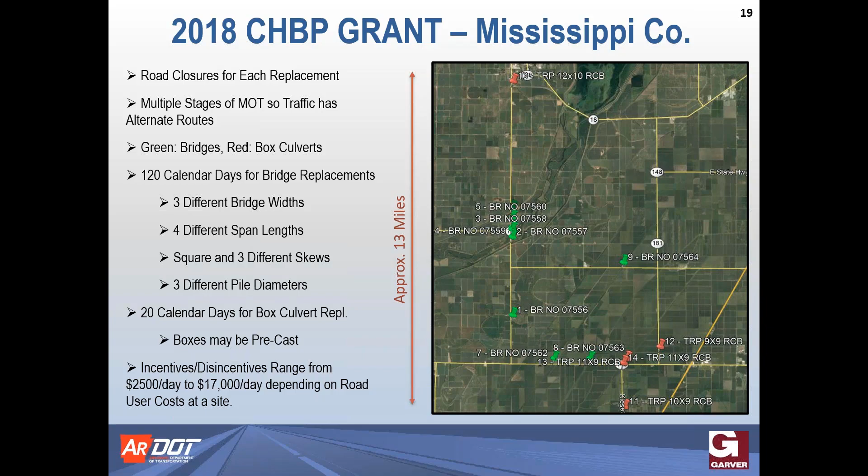I have time for maybe one more question. How much camber was built into the permanent lower cap, and was there a fit-up issue with the bridge cap? So I don't recall right offhand what that camber was. It was a fairly low deflection that was predicted on that, and it seemed to fit up really well. Thank you.